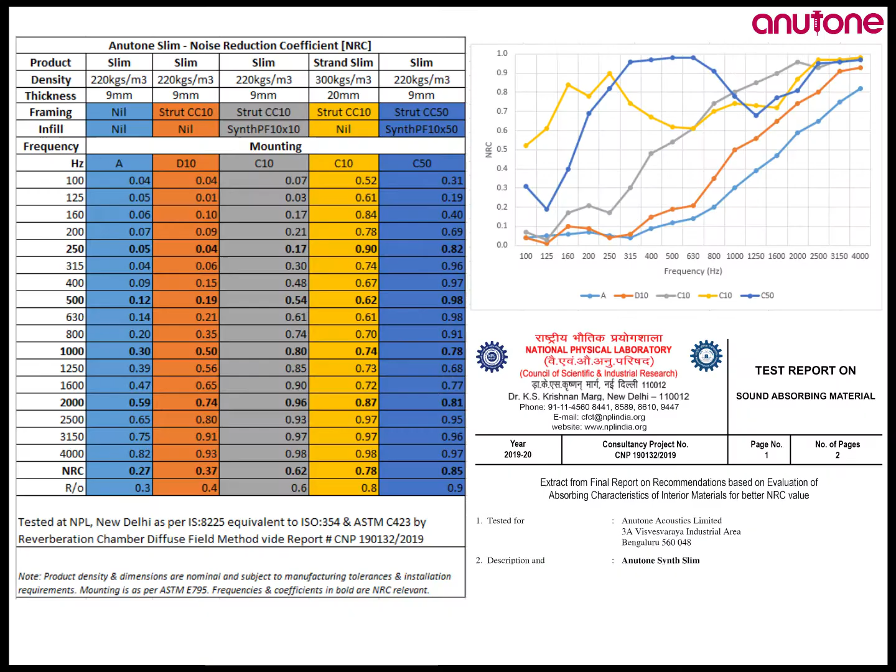In this episode, we are looking at PET panels, 9 mm thick, as to how best this can be installed. We are back with a rerun of this episode of Hear Yourself because we now have an actual test result of NRC from NPL that either corrects or validates our acoustical assessment of PET panels.

But just sticking PET panels to the wall, which is how it's used, do you think you can get the best of acoustics? I don't think so. So there's a science, and now a proof, as to how you can use these panels, and there's a method as to how you can install and extract the maximum out of a 9 mm PET panel.

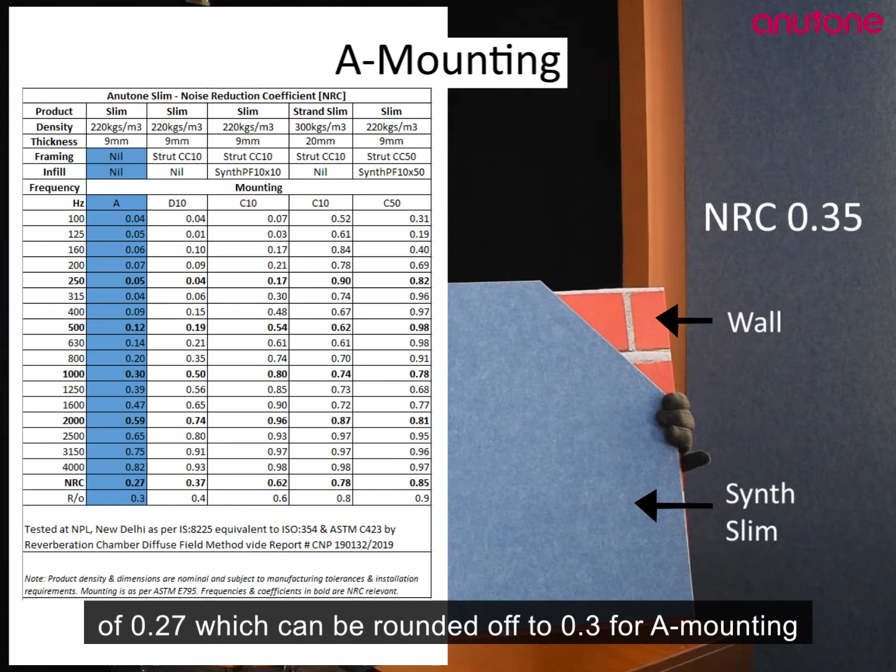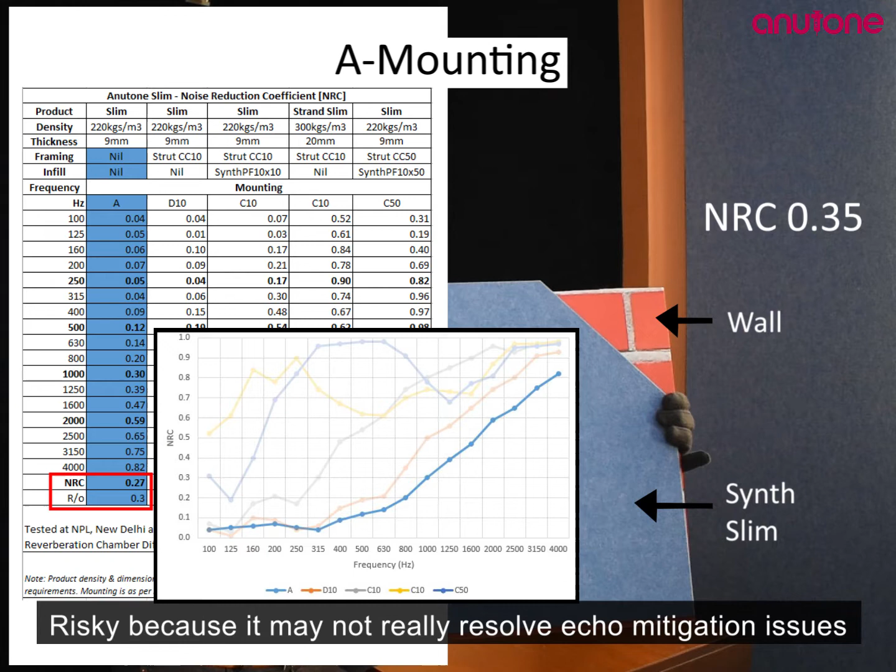So a 9 mm panel direct A mounting on the wall will give an NRC of 0.35, which all of us round off to 0.4. It turns out actual testing by NPL gives it an even lower NRC of 0.27, which can be rounded off to 0.3 for A mounting, much lower than what we thought. This is very low sound absorption if used directly on walls. Risky, because it may not really resolve echo mitigation issues.

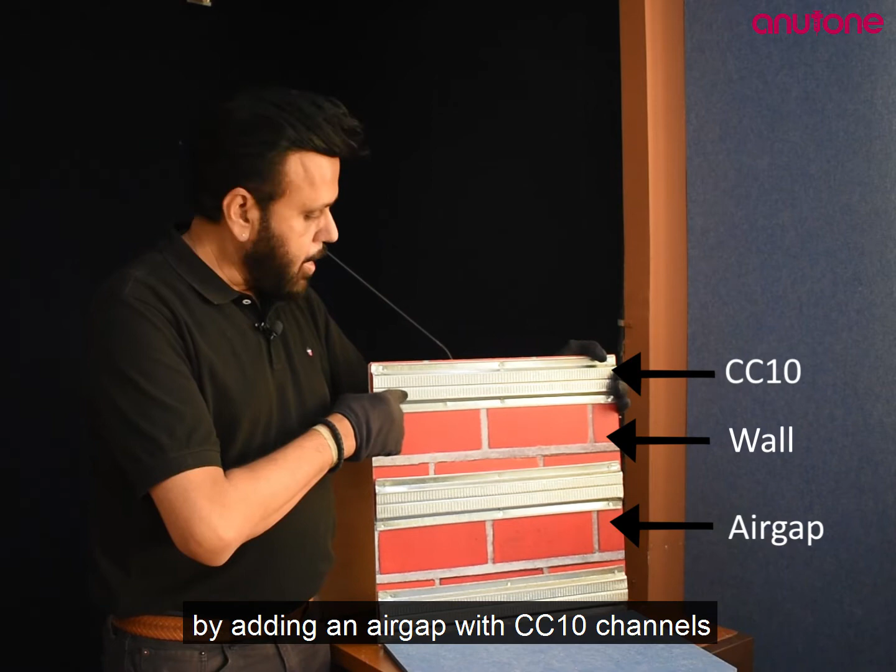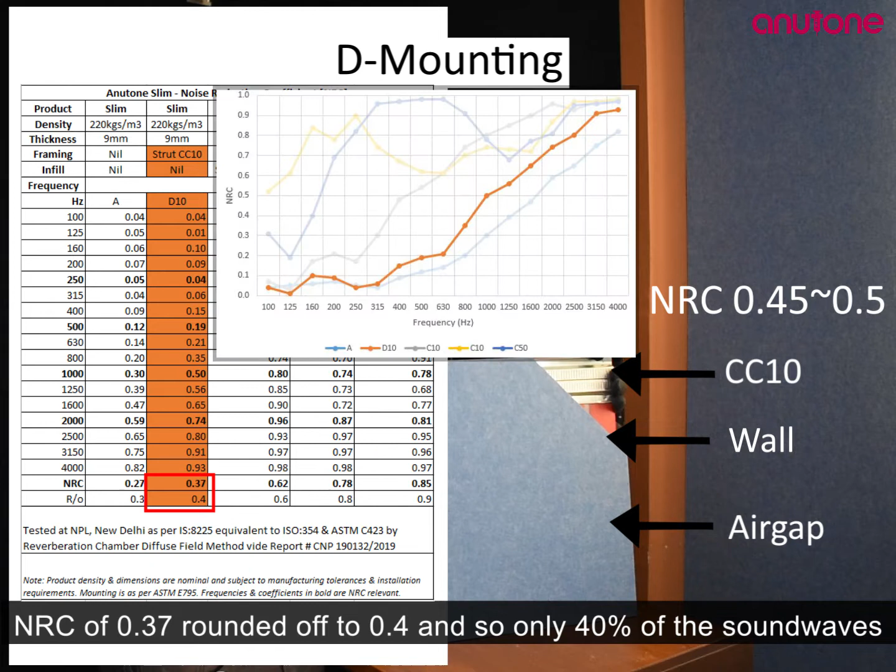By adding an air gap with our CC10 channels, a PET panel would give, say, 0.45 to 0.5 NRC. This too turned out to be way lower on actual testing by NPL, to an NRC of 0.37 rounded off to 0.4, and only 40% of the sound waves incident to the panel surface are absorbed with a D10 mounting.

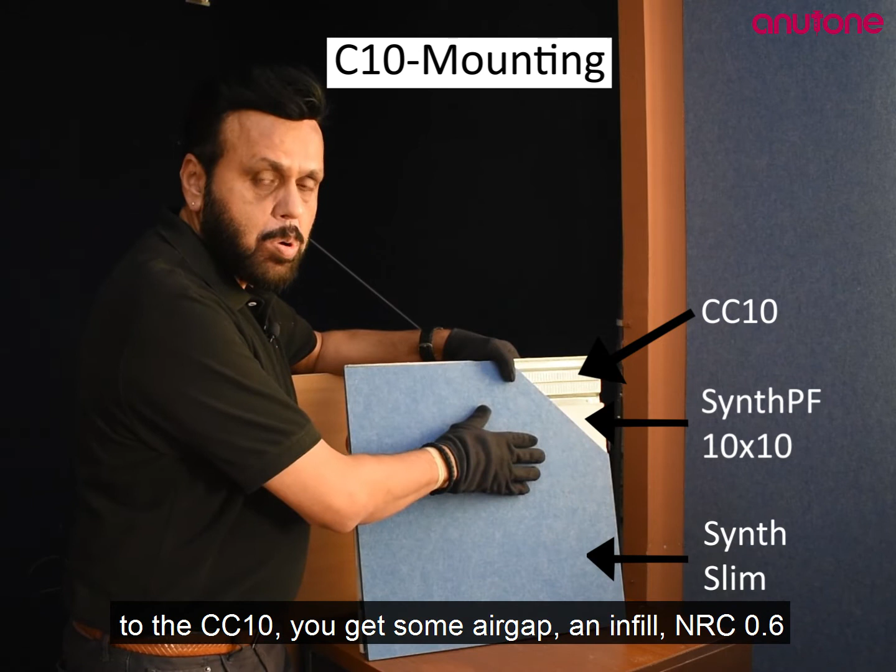So the next best thing would be to add synth 10 by 10, CC10, synth 10 by 10, and then you stick the synth slim, the 9 mm PET panel, to the CC10. You get some air gap, you get an infill, you get NRC 0.6, but the big difference is more of the mid and high frequencies.

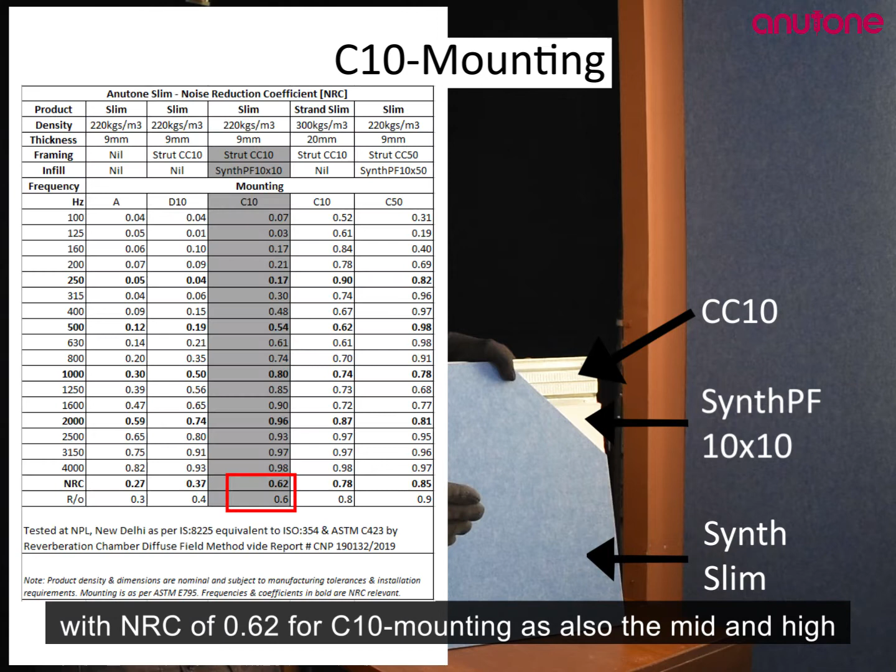We were spot on with this assessment, and the NPL testing validates it with an NRC of 0.62 for C10 mounting, as also the mid and high frequency sound absorption of 0.54 at 500 Hz, 0.8 at 1000 Hz, 0.96 at 2000 Hz.

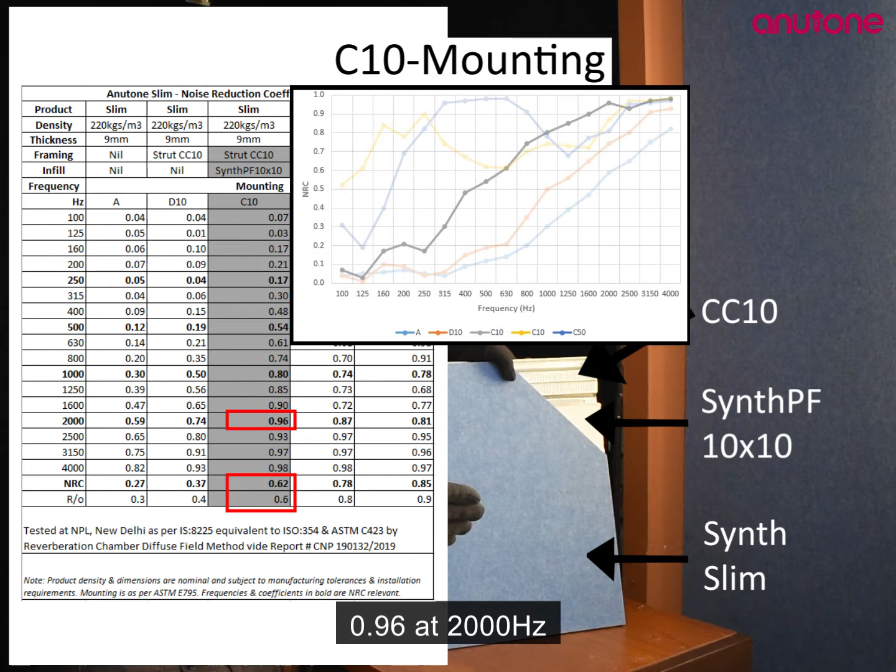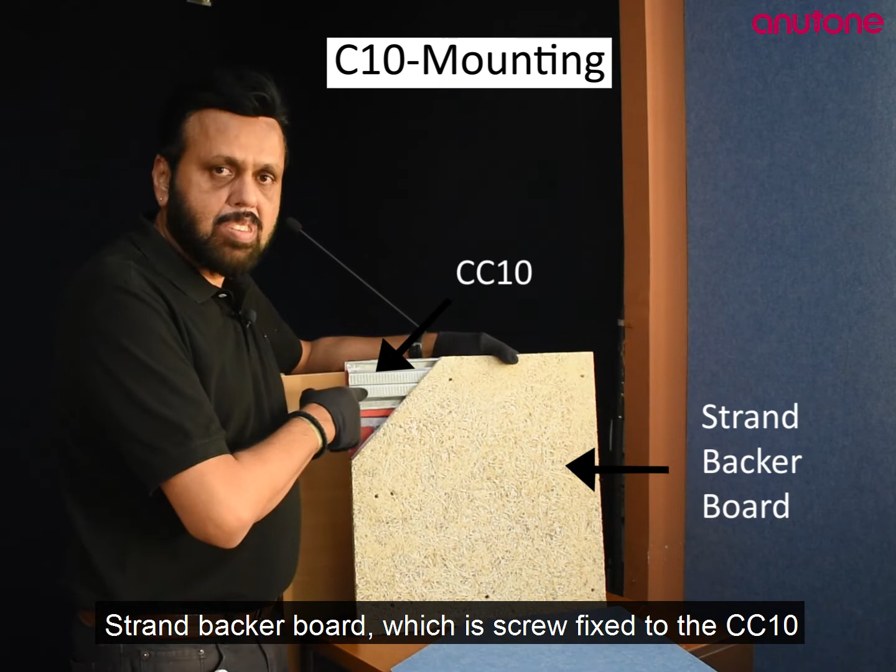So the best would be to use a strand backer board, which is screw fixed to the CC10 with or without the infill, and then stick the synth slim onto the strand backer board. This gives you the best acoustics. NRC 0.8 to 0.85. Yes, we do get NRC of 0.78 rounded off to 0.8 from the recent test results

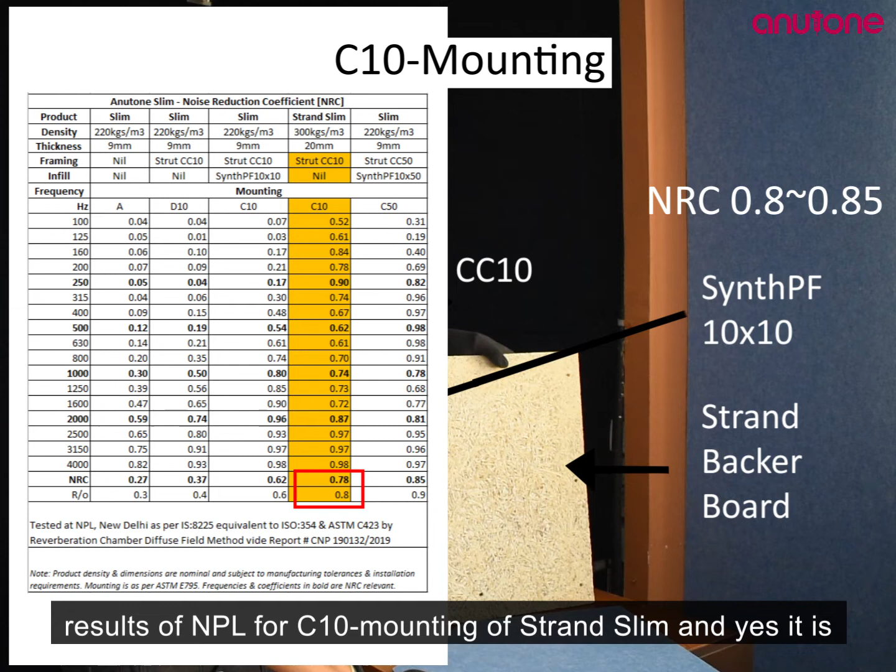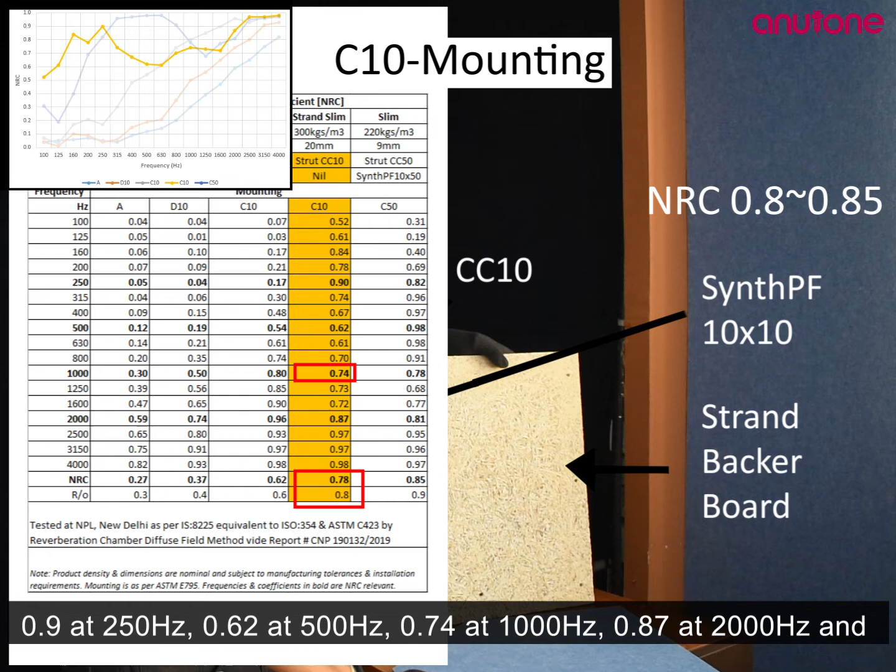of NPL from C10 mounting of strand slim, and yes, it is broadband sound absorption across the frequency spectrum, from 0.9 at 250 Hz, 0.62 at 500 Hz, 0.74 at 1000 Hz, 0.87 at 2000 Hz, and 0.98 at 4000 Hz. That's astounding. It's really outstanding.

We can do the magic of converting a humble 9 mm panel from 0.3 to 0.9 NRC by having more air, more synth in terms of thickness, thicker strand board, and then the 9 mm synth slim PET panels on it.

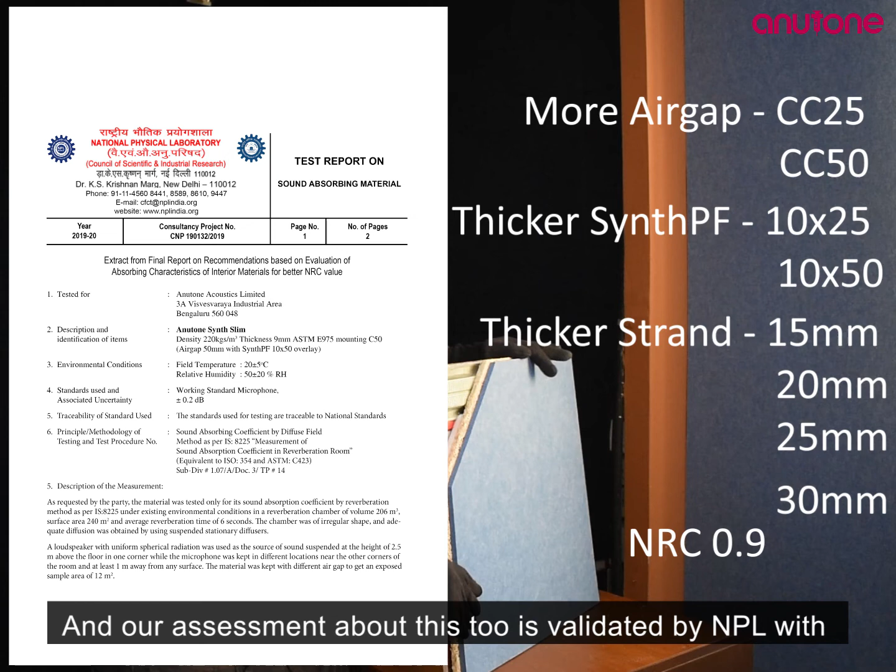And our assessment about this too is validated by NPL with C50 mounting of slim acoustical panels, which is a 9 mm thick, 220 kg per meter cube density PET panel mounted on strut CC50 framing with synth PF 10 by 50 infill, and returns an NRC of 0.85 rounded off to 0.9.

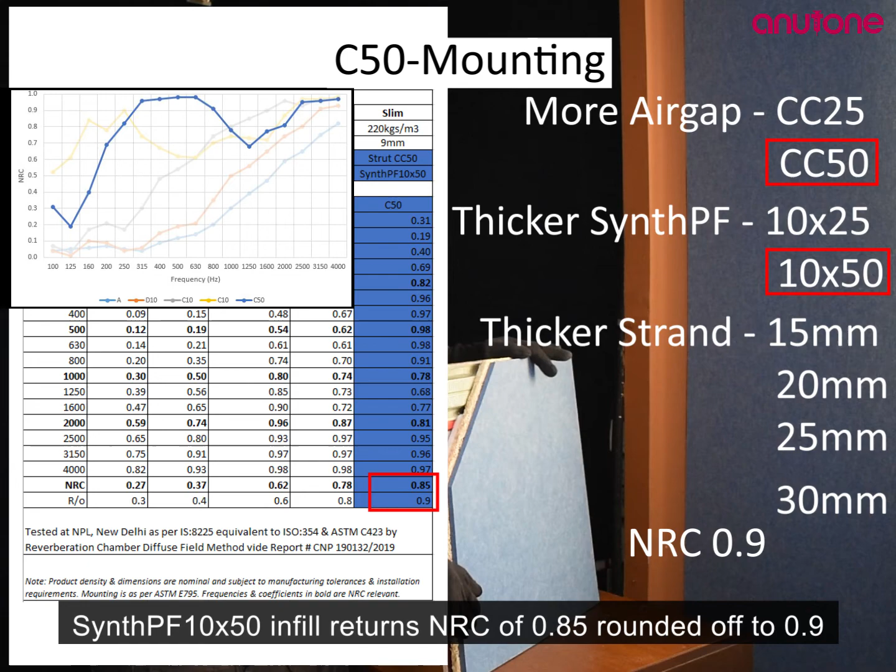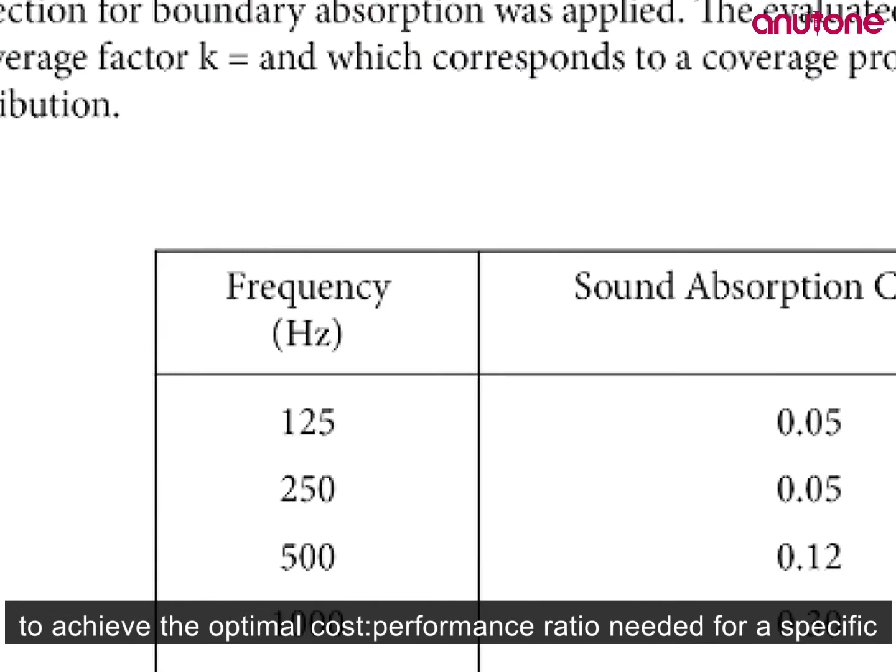The above NPL test results show the acoustical efficiency of PET panels is achieved with an intelligent engineering of the components to achieve the optimal cost to performance ratio needed for a specific project. It also shows the best broadband sound absorption across the frequency spectrum comes from strand slim 20 mm on CC10, with an overall system depth of 30 mm.